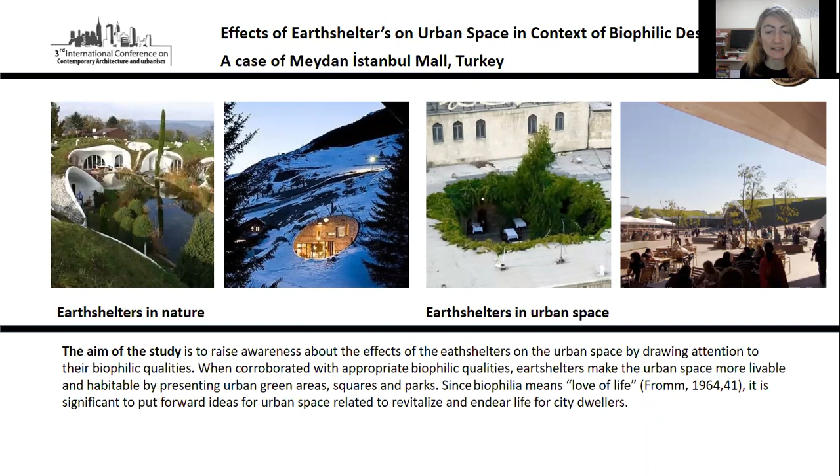The aim of the study is to raise awareness about the effects of earth shelters on urban space by drawing attention to their biophilic qualities. When corroborated with appropriate biophilic qualities, earth shelters make the urban space more livable and habitable by presenting urban green areas, squares, and parks. Since biophilia means love of life, it's significant to put forward ideas for urban space related to revitalize and endear life for city dwellers.

The significance of the subject: Beatley defined biophilic cities as cities where urban nature integrates with urban space. However, some urban biophilic qualities, like green roofs and green walls, he denoted as introducing superficial solutions. Biophilic city patterns should provide solutions aspiring to increasing and expansive forests in urban areas, boosting the green area in urban space rather than greening of terraces and roofs of buildings.

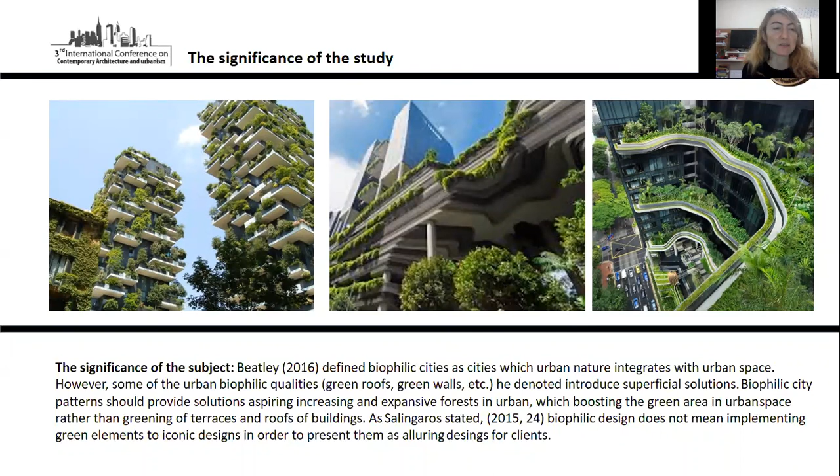As Salingaros stated, biophilic design doesn't mean implementing green elements to iconic designs in order to present them as alluring designs for clients. Biophilic architecture should respect the right of life of living creatures in urban areas and ensure the sustainability of urban biodiversity, considering that other living creatures in urban areas have biophilic tendencies like humans, so its strategies should be beyond adding small urban gardens to make urban space more livable.

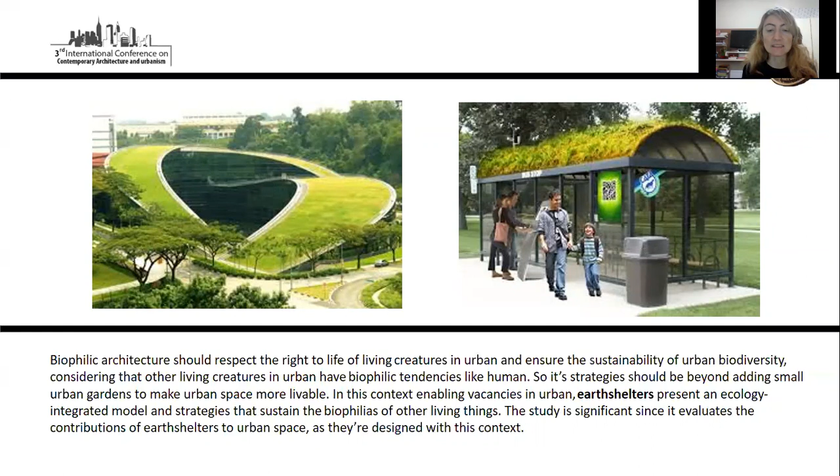In this context, enabling vacancies in urban earth shelters presents an ecology-integrated model and strategies that sustain the biophilia of other living things. The study is significant since it evaluates the contributions of earth shelters to urban space as they are designed with this context.

The method of the study: according to the biophilic design patterns stated in the literature analysis, earth shelters were compared with other conventional buildings in terms of their effects on urban space. Since it has a wide green roof and is located in urban space as an earth shelter, Meydan Istanbul Mall is presented as a case study, assessed with a critical method according to the biophilic architecture pattern in the literature. As it has a chance for suggesting a model, earth shelters in urban space in various cities are presented as examples.

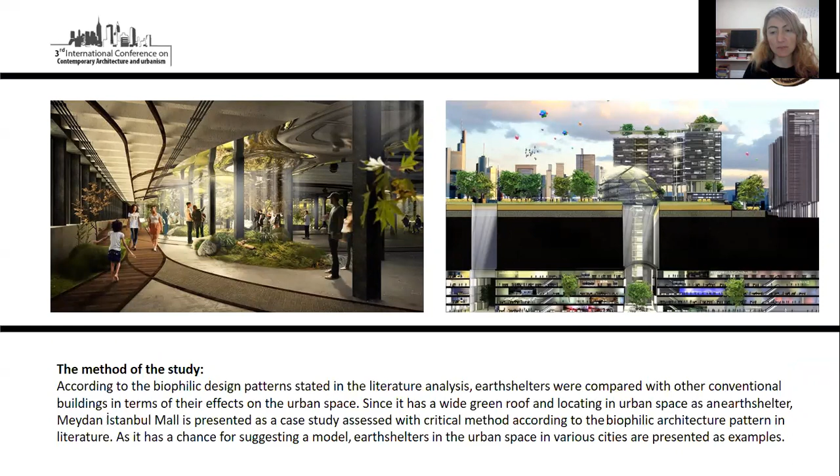Biophilia as a term was first used by Erich Fromm in 1964 for emphasizing humans' love of life and living organisms, an affiliation that humans seek. It's the opposite term of necrophilia, defining true love of death.

The idea was then put forward by Wilson as the biophilia hypothesis: a biologically based, innate desire for connecting to nature, affiliation to life and life processes, and innate tendencies to focus on life. It's a term in environmental psychology defining affiliation to nature. Here we are evaluating environmental psychology with dimensions of biophilic design: the naturalistic dimension, antecedent of nature, and vernacular dimension, a place-based dimension.

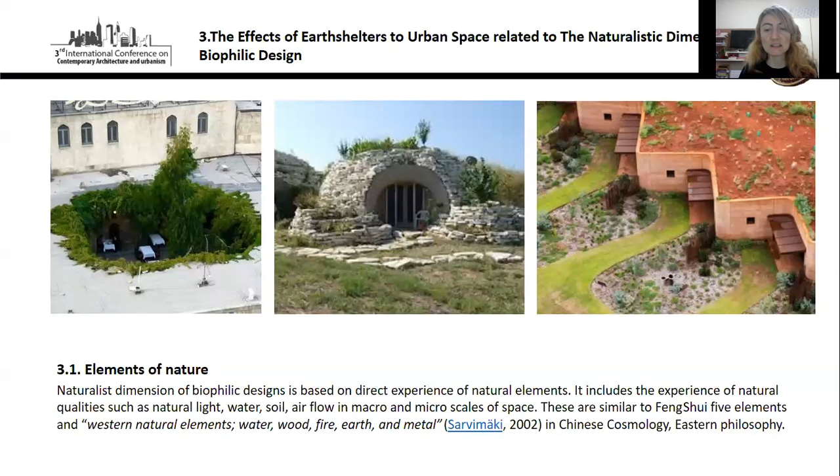Effects of earth shelters on urban space related to the naturalistic dimension of biophilic design. First, elements of nature: the naturalist dimension of biophilic design is based on direct experience of natural elements. It includes the experience of natural qualities such as natural light, water, soil, and airflow in macro and micro scales of space. These are similar to the Feng Shui five elements and Western natural elements—water, wood, fire, earth, and metal—in Chinese cosmology and Eastern philosophy.

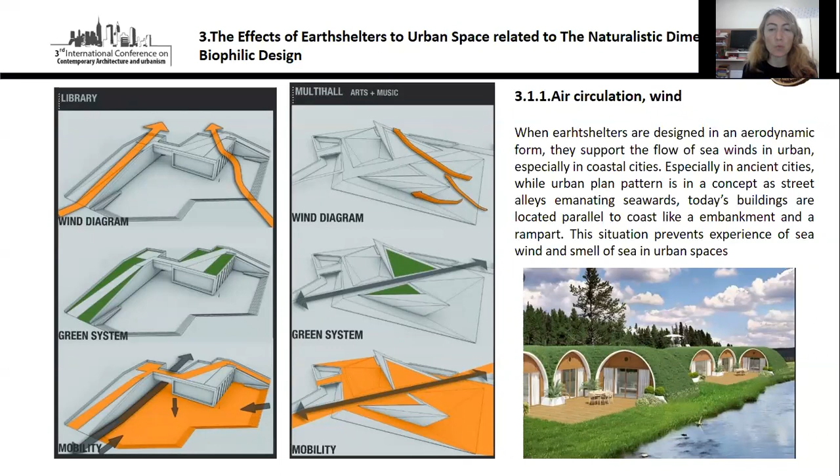Air circulation and wind. When earth shelters are designed in an aerodynamic form, they support the flow of sea winds in urban areas, especially in coastal cities. In ancient cities, the urban plan pattern featured streets and alleys emanating seaward, while today's buildings are located parallel to the coast like an embankment or rampart. This situation prevents experience of the sea wind and smell of the sea in urban spaces.

Sound. Earth shelters are urban structures supporting urban space interaction that can be articulated with public spaces and foster the tranquility of the urban space. They are designed as introverted spaces with entertainment or shopping facilities in urban areas. When this kind of crowded assembly area is taken underground, it provides a silent, calm experience to urban space due to the sound insulation feature of the soil. Urban space turns into a biophilic space where birds, water sounds, and children's voices are heard, thanks to this concept with green landscape and squares.

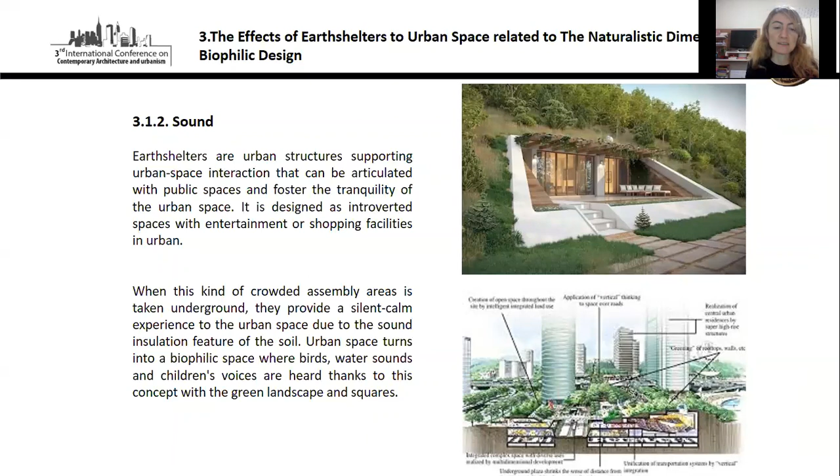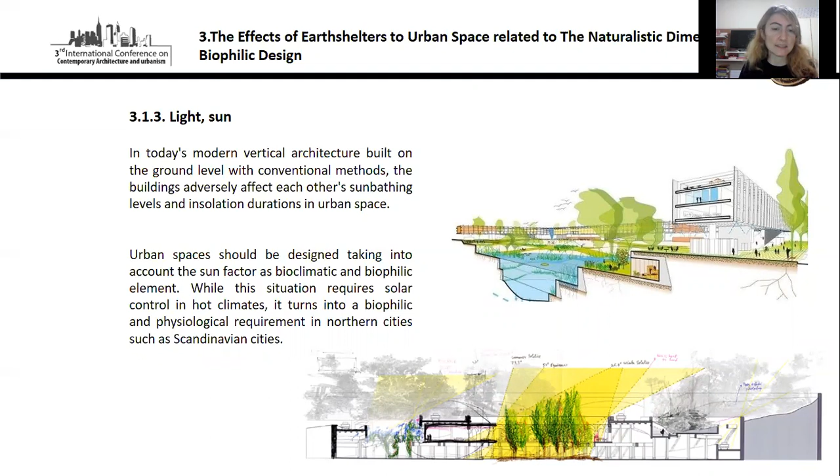Light and sun. Today's modern vertical architecture is built on the ground level with conventional methods. The buildings adversely affect each other's sun-bathing levels and insolation duration in urban space. Urban spaces should be designed taking into account the sun factor as a bioclimatic and biophilic element. While the situation requires solar control in hot climates, it turns into a biophilic and physiological requirement in northern cities such as Scandinavian cities. The purpose of architecture is to make people happy; however, the sun also has the function of adjusting the circadian rhythm of living things.

Related to this, the sun establishes the rhythm of nature. At the same time, daylight is also significant for humans to perceive time in urban and interior spaces. When humans don't perceive time for a long period, they come out of the sense of reality, which causes diseases like schizophrenia.

Nowadays, introvert shopping malls with atriums have turned into places where we can feel the sun, the wind, and nature, with courtyards, squares, and urban arenas like Meydan Istanbul Mall. In the past, people felt fatigue and headache in artificially illuminated mall corridors, but today earth-sheltered shopping mall samples like Meydan Istanbul Mall serve as a biophilic courtyard, like a sunbathing place, chaining an arena to urban space. In addition, its dormer windows located on the green roof serve as a biophilic experience indoors with daylight.

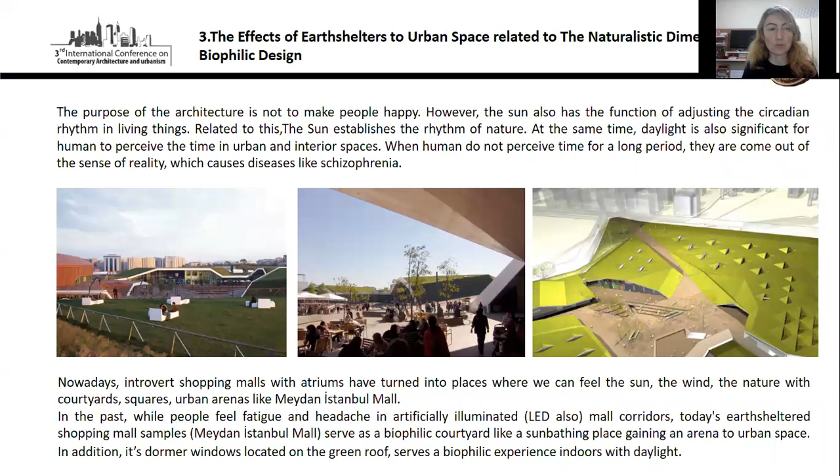Water. Since water has a cooling effect, it's used as a bioclimatic element in architectural design. However, when designed with proper interaction with space users, it can also serve as a biophilic factor.

In the mosque project designed by Manço, architecture is the model strategy that people in the place interact visually with water. The application of a similar strategy in earth shelters will ensure that the shelter space becomes more dynamic and biophilic with light reflections of water in urban space.

When properly designed in an acoustic context, sound and smell spread evenly into the space and integrate with the smell of the soil. The hotels in Cappadocia have bedrooms with pools designed with this biophilic strategy. In these rooms, solutions strengthen the biophilic effect by creating a daylight effect thanks to yellow lights.

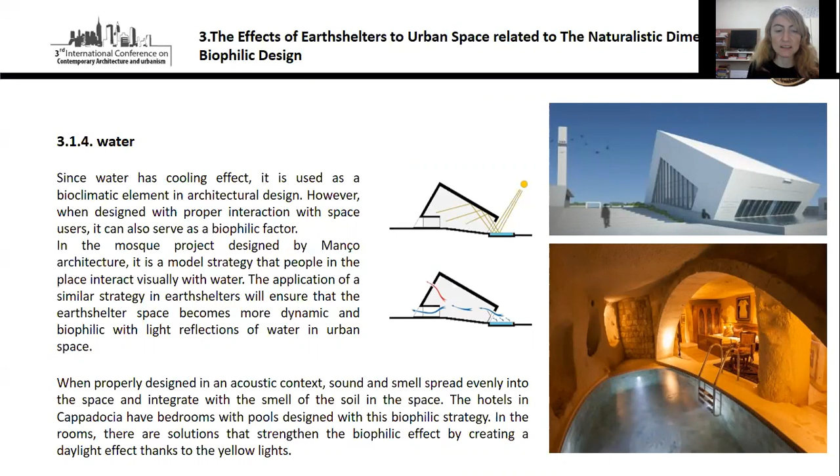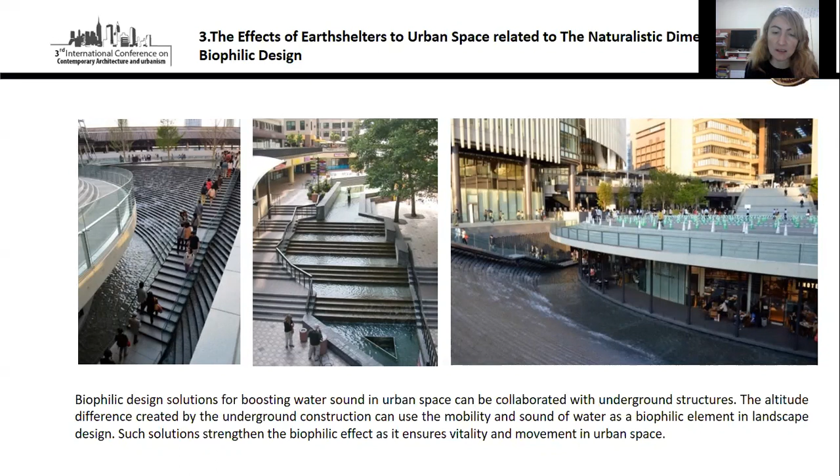Biophilic design solutions for boosting water sound in urban space can be collaborated with underground structures. The altitude difference created by underground construction can use the mobility and sound of water as a biophilic element in landscape design. Such solutions strengthen the biophilic effect as it ensures vitality and movement in urban space.

Feeling of safety: the first space proposed in exceptional circumstances such as earthquakes, natural disasters and wars are earth shelters and underground spaces. Many protective qualities of soil, such as radiation protection, sound and noise protection, and earthquake safety, make earth shelters and underground spaces advantageous.

Earth shelters serve both instinctive biophilic tendencies, the need to experience mystery, and the need for security, while maintaining the quality of space attraction in both uses. In this context, they also contribute to the urban space in terms of tourism and economy.

Similarly, the feeling of security and mystery in inland mountain space is widespread in some cities as places with biophilic alluring space when combined with the seaside landscape.

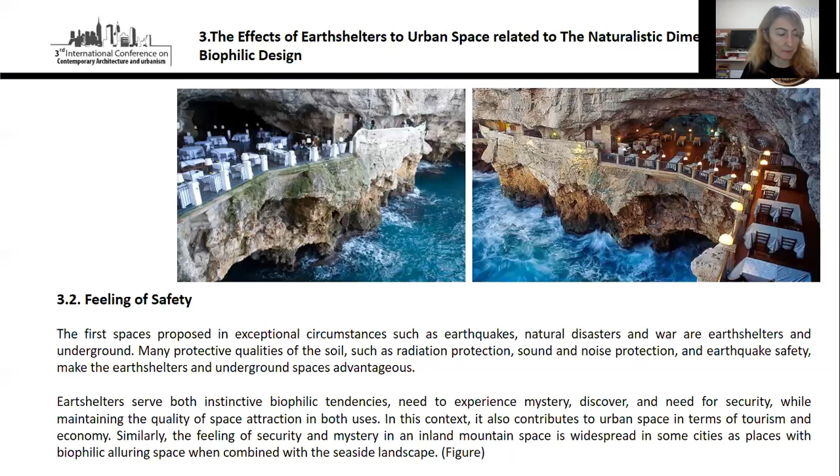Prospect is defined as an unimpeded view over a distance for surveillance and planning. Humans evolved in adaptive response to complementary benefits of prospect and refuge. Prospect refers to long views of surrounding settings that allow people to perceive both opportunities and dangers, while refuge provides sites of safety and security.

Earth shelters as massive public buildings, such as congress centers, auditoriums, cinemas and theaters, affect the city silhouette in urban space. In this context, they also increase the landscape quality of the city and urban biophilic value.

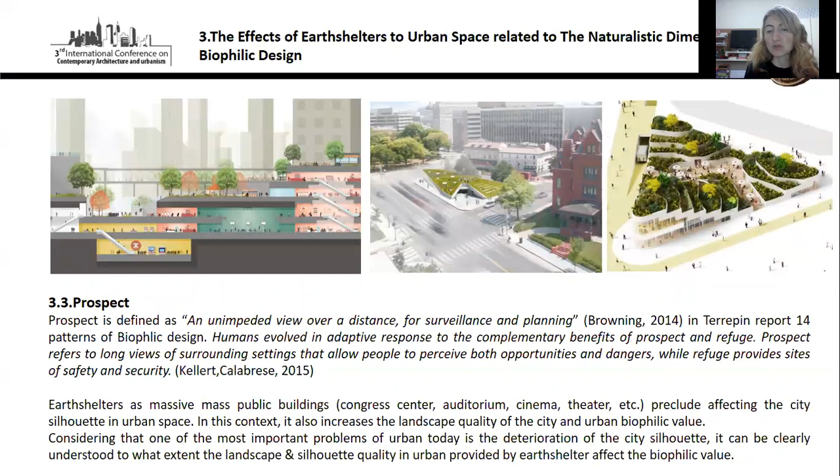Considering that one of the most important problems of cities today is the deterioration of the city silhouette, it can be clearly understood to what extent the landscape silhouette quality provided by earth shelters in urban space affects biophilic value.

Interaction with urban space in earth shelters manifests itself as infinity and immensity within the borders of the earth shelter. The aim here isn't only interconnection with the landscape; the limitlessness of the space aims to serve the city dweller, a feeling like a flaneur who travels in modern time passages.

Although this vitality, mobility and dynamism seem only as the face of modernism, it's also a biophilic experience. No organism in nature is stable; there is continuous interaction. Spinoza said the interaction of modes is inevitable in Ethika.

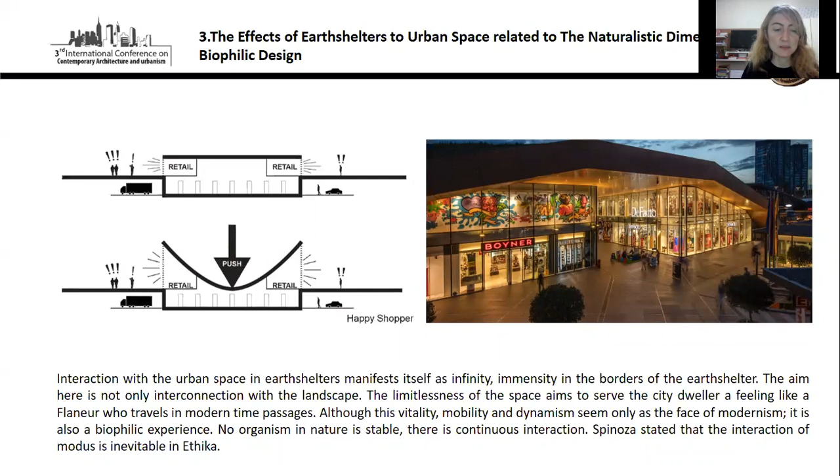Refuge and opportunity: earth shelters located in nature use design approaches such as the neighborhood principle, sharing opportunities in planning, and high positioning to see dangers, so prospects are seen.

In urban space, opportunities can turn into possibilities within the scope of accessibility of the earth shelter space — movement, being open to pedestrian circulation, meeting the square by pedestrian paths, or creating a square in urban space, as made in Istanbul Mall.

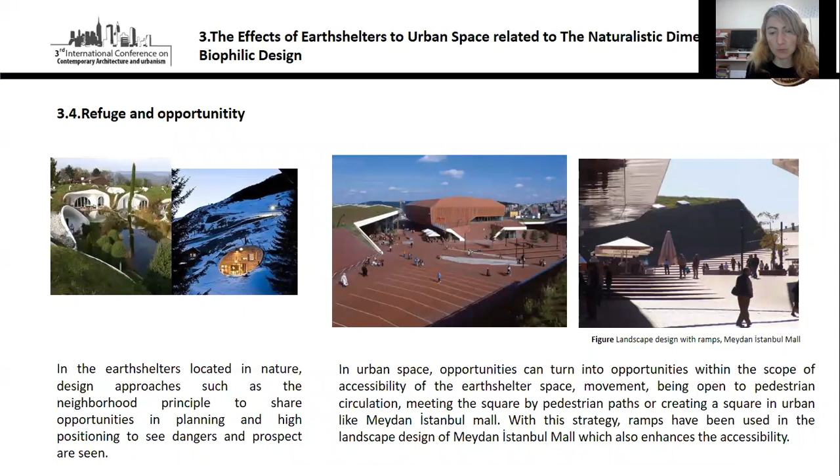With this strategy, ramps have been used in the landscape design of Meydan Istanbul Mall, which also enhances accessibility.

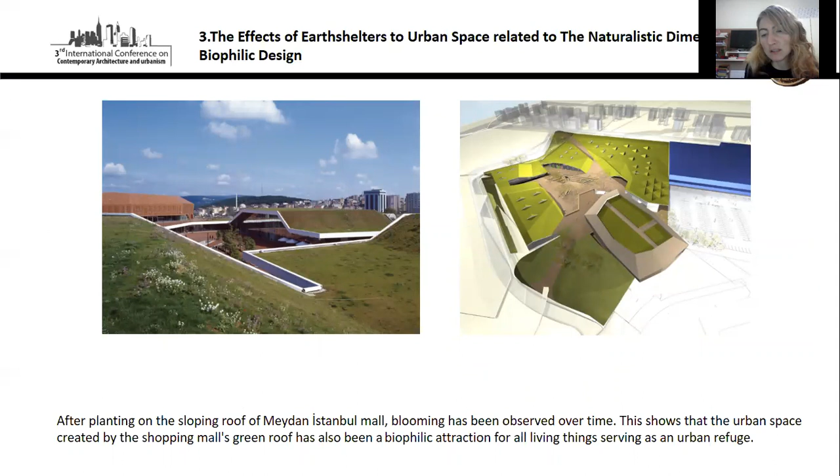After planting on the sloping roof of Meydan Istanbul Mall, blooming has been observed over time. This shows that the urban space created by the shopping mall's green roof has also become a biophilic attraction for all living things, serving as an urban refuge.

Enticement of nature: stimuli, inspiration and motivation effects of Meydan Istanbul Mall. As Chalfont stated, being in the garden motivates people to do things. Chalfont highlighted that the enticement of nature results from stimulating natural features through a visual and non-visual connection with nature.

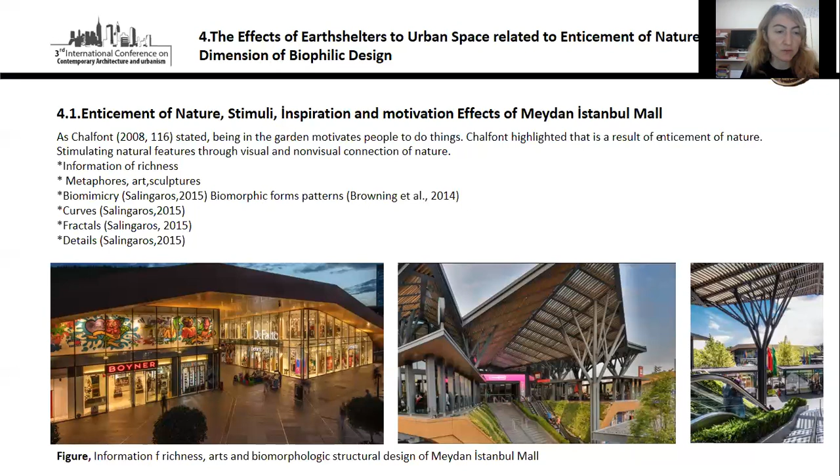Information richness, metaphors, art, sculptures, biomimicry and biomorphic forms, patterns, curves, fractals and details are the enticement of nature elements. Here are Meydan Istanbul Mall figures, showing the biomorphic structural design of the mall and the information richness and arts on its facade.

The effects of earth shelters on urban space relate to the place attachment dimension of biophilic design. Reflecting modernism as basic forms doesn't tone with vernacular architecture, so place-based biophilic tendencies are negatively affected as humans don't feel place attachment and sense of ownership.

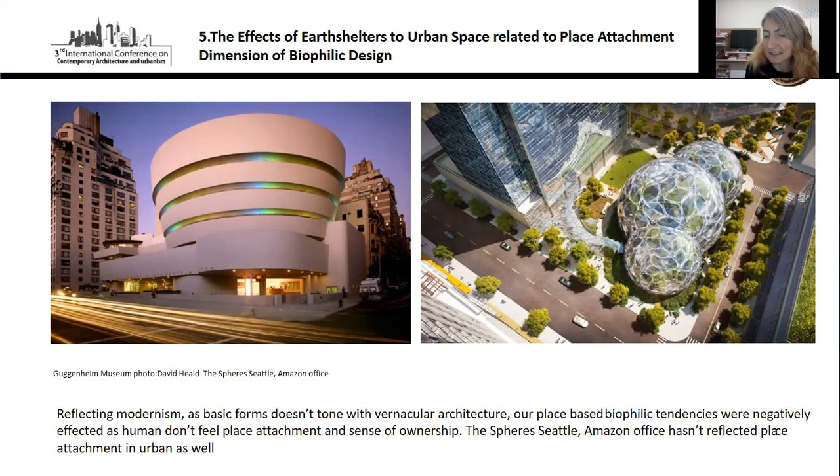The Spheres Seattle, Amazon office hasn't reflected place attachment in urban space either. Everything in nature is in flow, loop and motion; however, in this flow and loop, the modus doesn't turn out without details.

Even a snowflake falls on Earth with its fractal details and original geometry. However, the movement in modern cities causes buildings to be without details. This situation deprives our sense of place attachment and feeling of place in urban space.

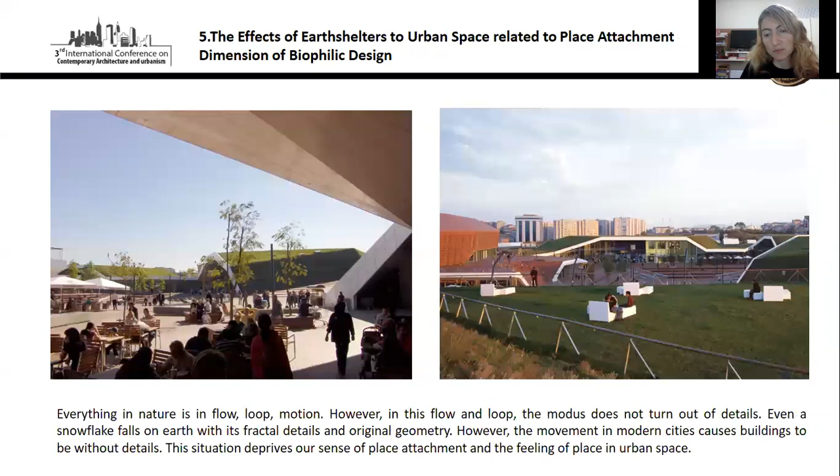Conclusion: the biophilia level of all people isn't the same in every period of their lives. Plants and nature that feel good in some periods can cause different effects in different processes of human life. All living things should have biophilia, and it should be taken into consideration that biophilic spaces are created in urban space.

Urban space can attract other creatures as well. Considering that the ecological chain is a whole, it's important to use urban design strategies to keep all living things alive. Thank you.